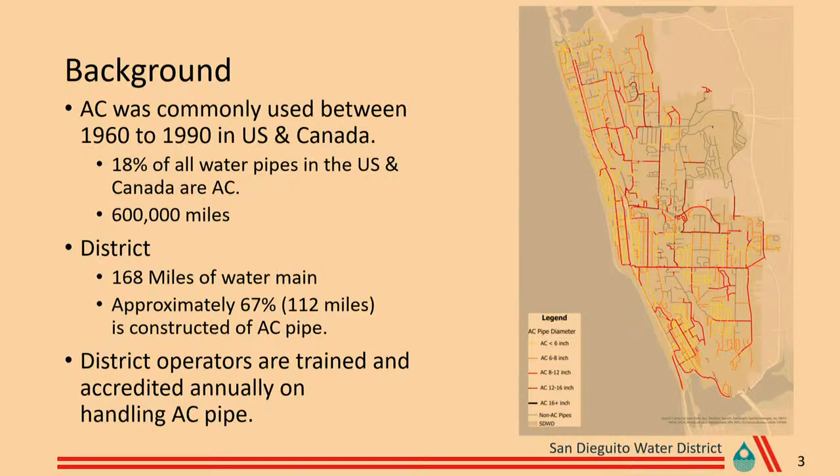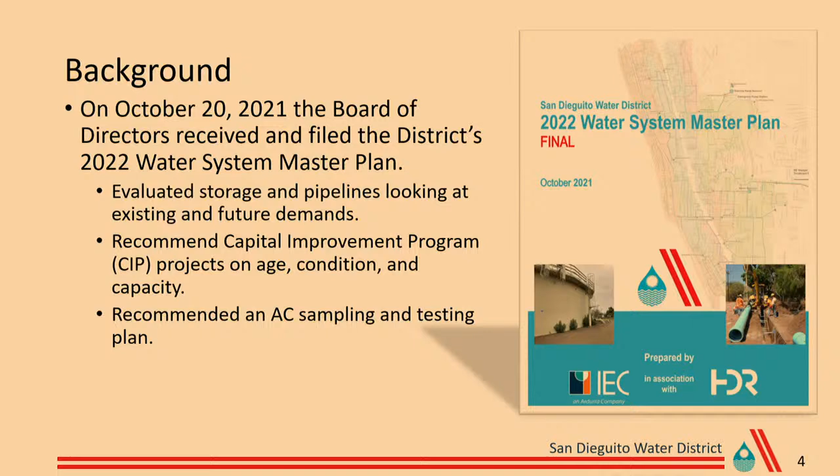In October 2021, the Board of Directors received and filed the district's water system master plan. This evaluated storage and pipelines and looked at existing and future demands. The water system master plan recommended capital improvement projects primarily based on age, condition, and capacity, and further recommended an AC sampling and testing plan.

On November 15, 2023, the board authorized a contract with Hoch Consulting and HDR Incorporated to perform a risk assessment analysis on the district's AC pipelines. The AC condition assessment reviews the AC pipelines in our system based on a thorough risk assessment, taking a look at samples and testing of AC pipe, soil condition, and our maintenance history. This was in order to make a data-driven decision in how we're going to replace the AC pipelines in our system.

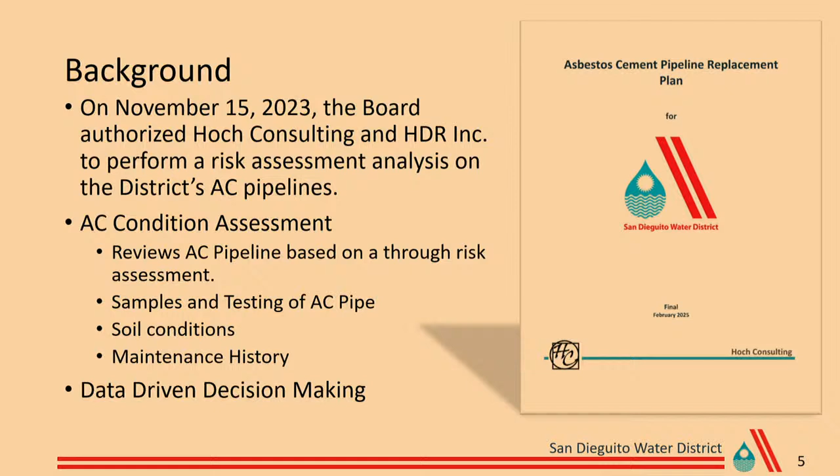And I'm going to hand it over to Adam Hoch from Hoch Consulting. He'll cover the technical approach of how we got to this report.

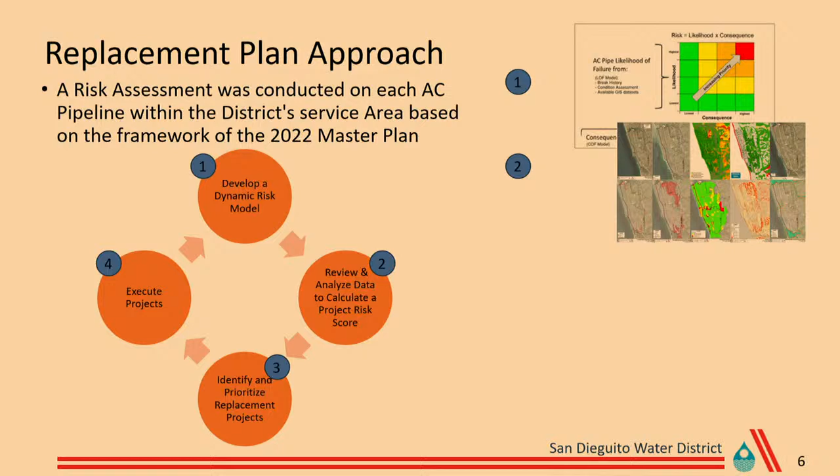Thank you, Elmer. Our approach to the replacement plan is really fourfold. The first element was to develop a dynamic risk model, dynamic meaning it can be updated by the city as additional information from the sampling and testing plan comes in. The second element was to review and analyze the data we had on the district system and calculate a project risk score, the risk of failure for any pipeline in its system. The third element was to identify and prioritize replacement projects for the next 10 years for the district. The last element was the execution of the project, the replacement element.

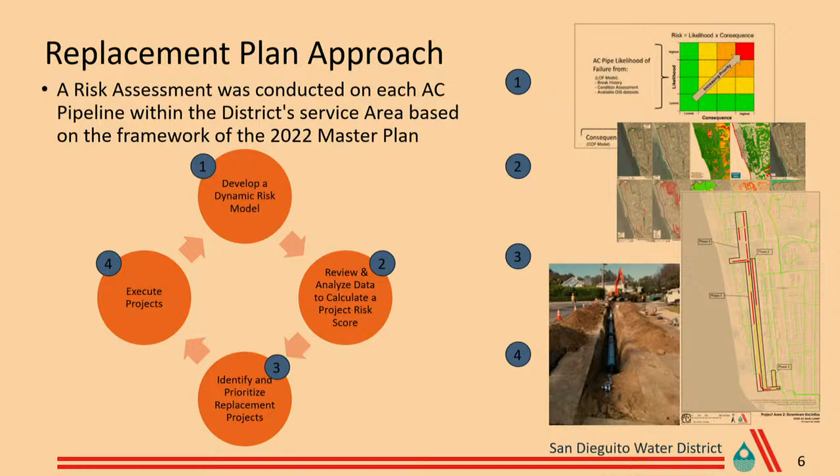A little bit about the first step, the dynamic project risk score model. It's built based on asset management principles, maximizing the life cycle of your assets. There are two main features: likelihood of failure analysis and consequence of failure analysis. Likelihood of failure essentially gives a probability that a particular pipeline is going to fail, given various characteristics and environmental factors. The consequence of failure speaks to the impacts of a particular failure. You've probably heard of the triple bottom line for consequence of failure — we look at the fiscal, social, and environmental impacts of any particular failure.

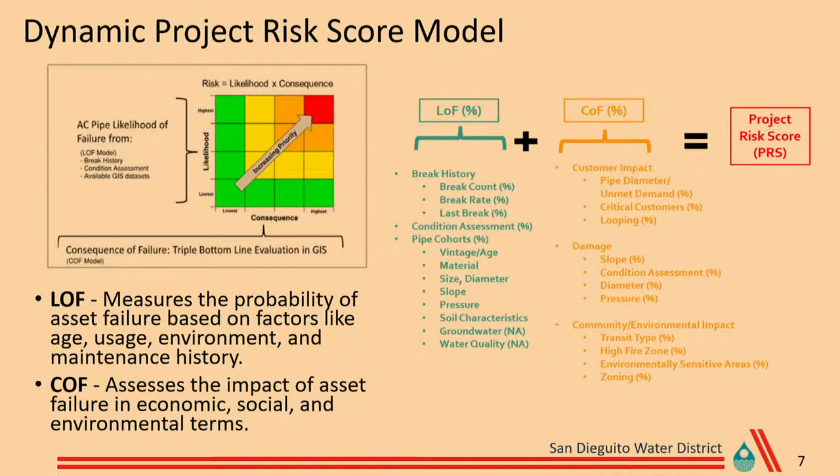This particular diagram speaks to an additive approach to developing a project risk score. We take a weighted likelihood of failure score and add that to a weighted consequence of failure score to develop the overall project risk score.

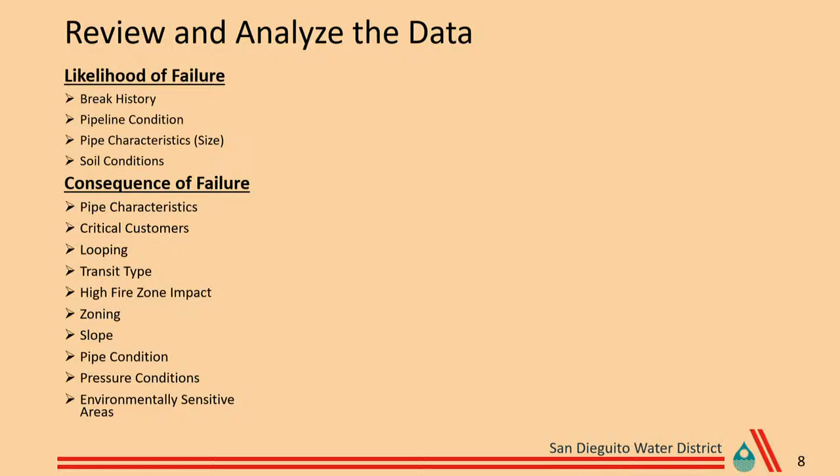In the review and analysis of the data, there are a number of characteristics we look at for both likelihood of failure and consequence of failure. This is a pretty exhaustive process of all the data available in GIS and from the district. Things that typically impact likelihood of failure are break history, the actual condition of the pipeline, and environmental factors and characteristics intrinsic to the pipe, like pipe size.

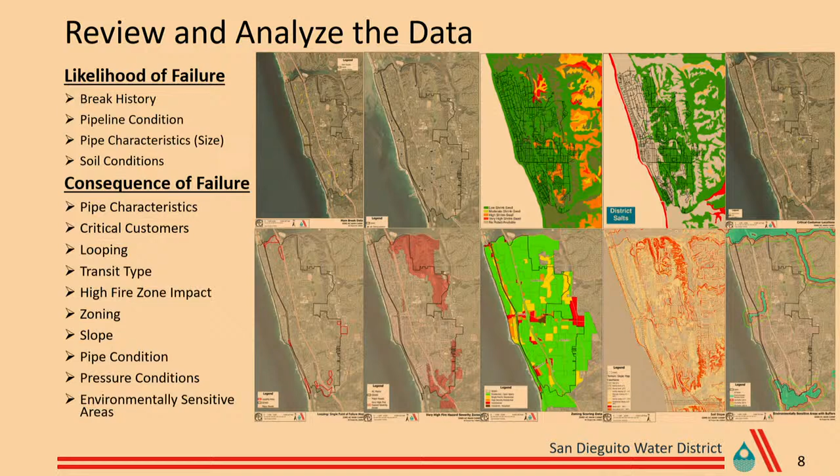The other element is consequence of failure. This is more of a qualitative approach in addition to a quantitative approach, to calculate the economics of failure and identify items critical to a particular district and city. An example is our critical customers evaluation: if a pipeline were to fail, would any critical customers like hospitals be put out of service? That's evaluated in the consequence of failure section.

For likelihood of failure, we focused on two main characteristics. The first is break history. For AC pipelines specifically, data consistently shows that pipes that have broken before are more likely to break again. In doing this analysis, we noted that the district system is performing exceptionally well compared to other systems of a comparable nature.

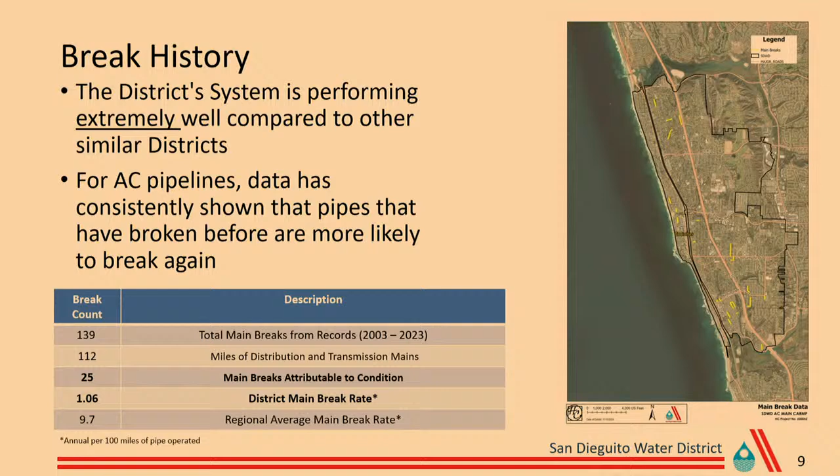One thing we use to identify that is the main break rate. The district's main break rate in that table, the second row from the bottom, is just over 1 break per 100 miles of pipe operated per year, whereas the average of the other agencies in the study was closer to 10 breaks per 100 miles per year.

The second characteristic we looked at was pipeline condition. AC main can deteriorate over time for a variety of reasons, and pipelines that have deteriorated are more likely to break. This was one of the reasons for the 2022 recommendation to implement an AC sampling and testing program, and the preliminary data from that was used in this study to inform our recommendations.

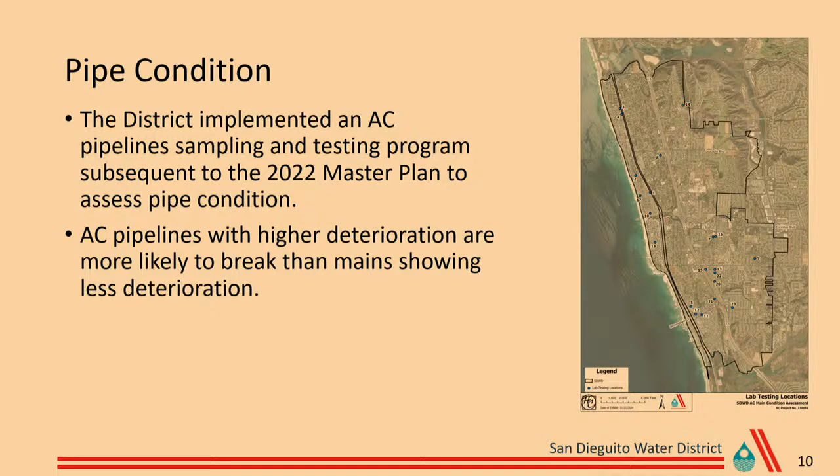This is a graphical overview of how we came up with a project risk map, and how likelihood of failure differs from consequence of failure to ultimately arrive at our project risk score. The left graph shows the raw likelihood of failure scores by pipeline segment. Green means a lesser likelihood of failure, whereas yellow, orange, and then red pipelines show a higher risk of failure.

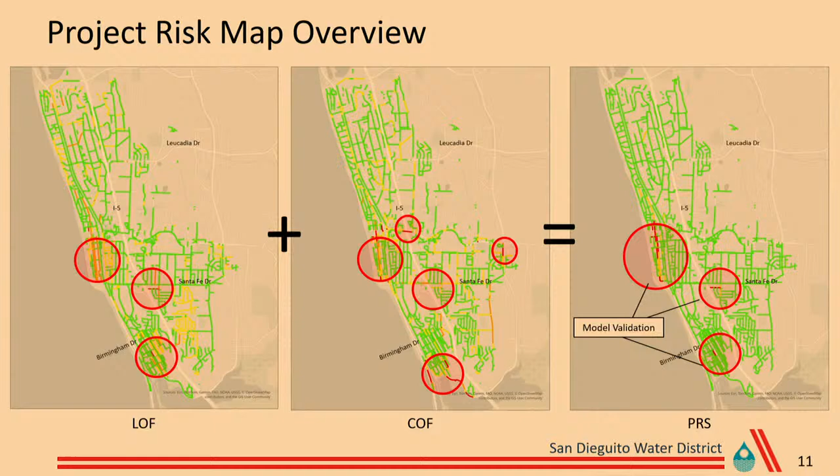Similarly, consequence of failure is shown in the middle graph, and the overall project risk score, once we add those weighted values together, comes out on the right-hand graphic. Once we came up with that project risk score, we did a calibration of the model to make sure it reflected real-world observations. Pipelines identified in the 2022 master plan that are currently in process for replacement, either design or preliminary construction, were used to calibrate the model.

This methodology came up with two main project areas. The first is Faith and Mackinnon. This recommendation is a little under 2,000 linear feet of 6 and 12-inch diameter pipeline replacement, adjacent to one of the areas identified in the 2022 master plan as needing replacement. Key drivers: the pipeline on Faith had 2 breaks within a relatively short time span, 2.3 years since the break. Additionally, the sampling and testing program showed this pipeline was deteriorated more relative to other pipelines.

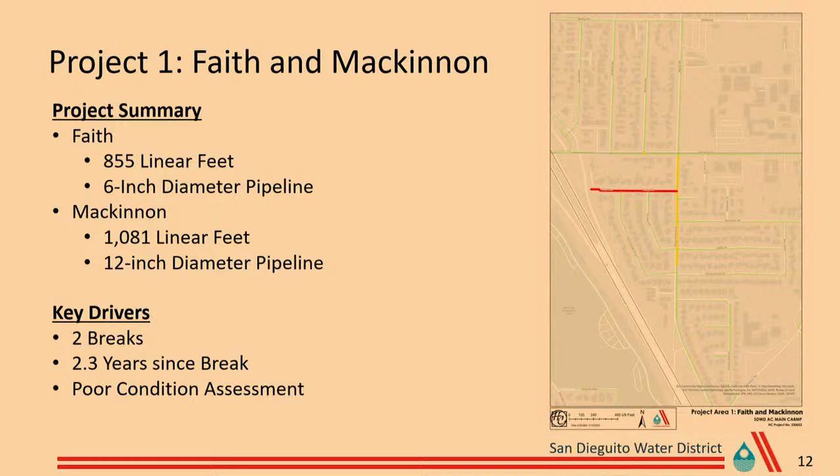The second project area is in downtown Encinitas. The pipelines we identified here are over 10,000 linear feet, and the replacement plan phases this into 3 different projects. It is 4-inch, 6-inch, and 12-inch pipes. Again, the key drivers are multiple recent breaks and poor condition, and this project also has some inoperable valves in it, which will be replaced as part of it.

And with that, I'll turn it back over to Elmer.

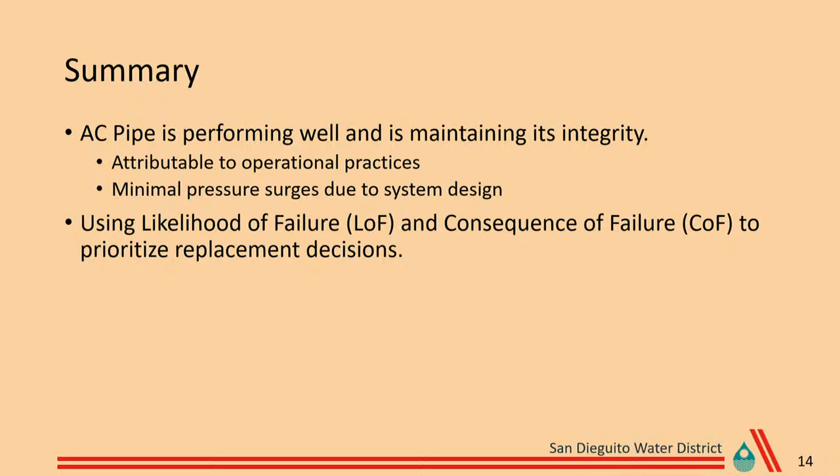Thank you, Adam. So in summary, our AC pipe is performing very well and maintaining its physical integrity. A lot of this is attributable to our operational practices, including minimal pressure surges due to our system design, which is a gravity design. And using likelihood of failure and consequence of failure to prioritize our replacement decisions came up with those 2 projects.

So I want to frame how those projects fit into the next 10 years with some of the projects in the water system master plan. The first project is the Cardiff replacement project, that's ID number 1. That was identified as project number 1 and 2 in the water system master plan, and is currently in design. We also have the water system capacity improvements.

We're also doing an ARV and blow-off replacement phase 2, and then the Faith and Mackinnon downtown phase 1, phase 2, phase 3, as Adam is saying, to break that apart due to cost, to level out expenses, but also from an operational standpoint it'd be very difficult to replace that many mains in one project and keep everyone's water service going.

I'll come back to this slide to cover more of the projects. So the Cardiff replacement project, again, was in the 22 water system master plan. Like I said, it's in design. It's about 3,300 linear feet of replacements all along Cambridge, Oxford, Montgomery, Newcastle area in Cardiff.

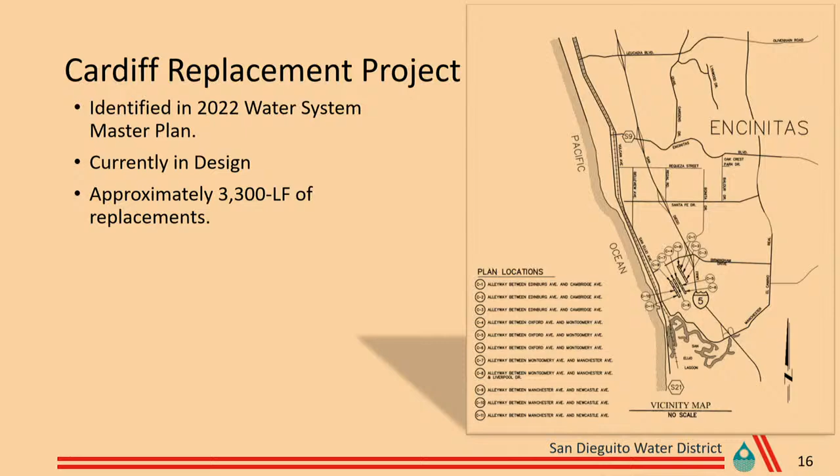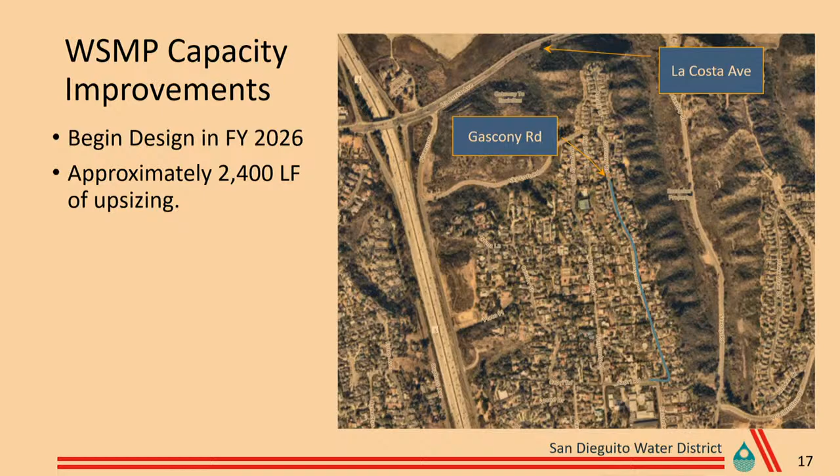The water capacity improvements project, that was ID number 2. We're going to begin design in fiscal year 2026. This is approximately 2,400 linear feet of upsizing, including a segment on Gascony, just south of La Costa Avenue, and a couple areas on the south side, Avocet Court and Via Temple—about 1,400 linear feet of upsizing of pipe.

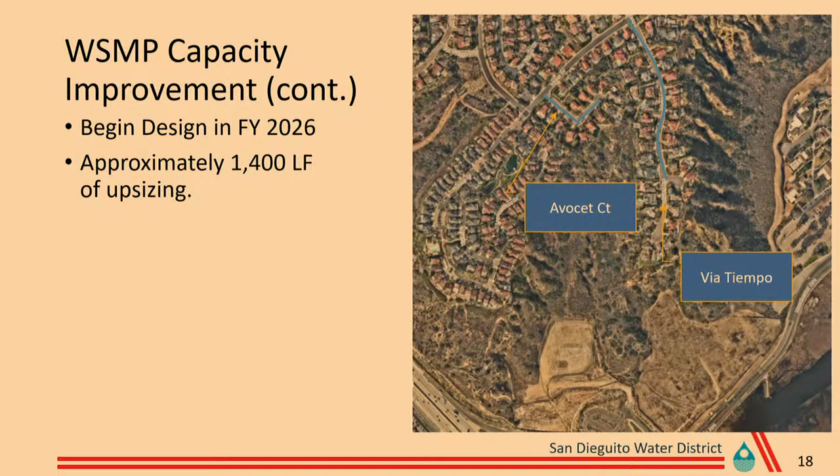Along with this plan, we'll also be implementing this asset management from Hogue. They're giving us a replacement analysis tool, so we'll update this model they prepared for us periodically as new data comes in, such as new breaks, or as we continue sampling, if we discover other areas of deterioration, to help us make decisions along the way. This will be a continuous business practice by the district staff.

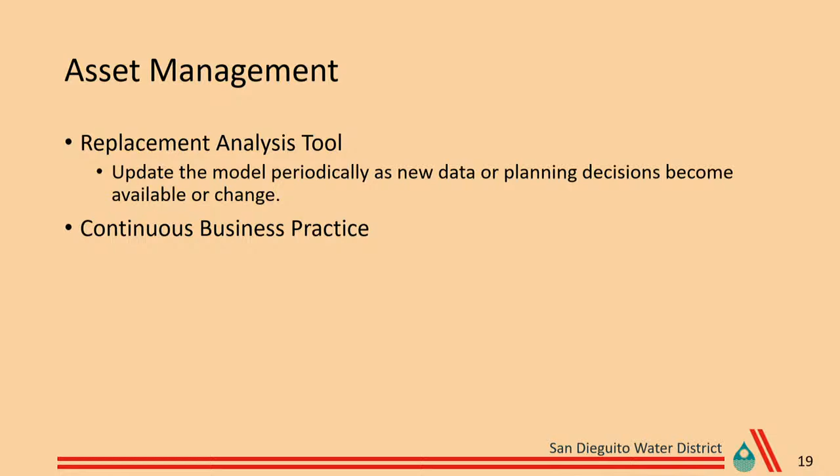Staff's recommendation is to receive and file the asbestos cement pipeline condition assessment and replacement plan. Staff is available if you have any other questions.

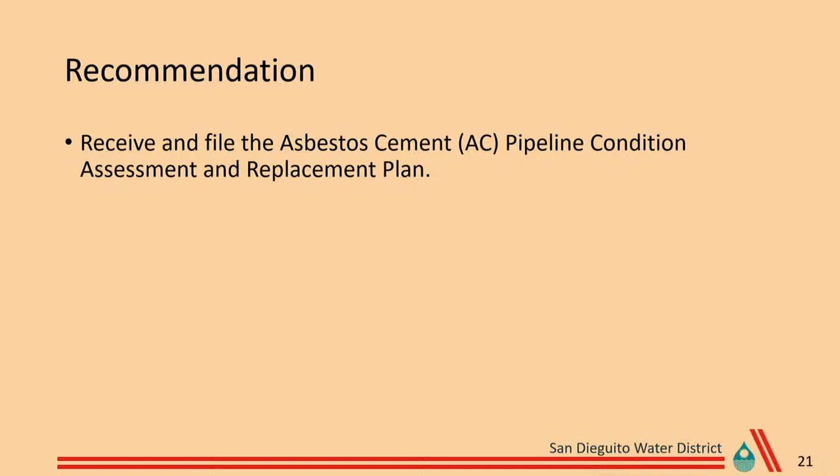Thank you for the presentation. I don't see any speakers in the queue yet. Oh, yes, thank you, Board Member Schaefer.

Thank you for the presentation, really appreciate it. With all of the priorities, do we have any look at—again, I've made mention over the last month of us being a high earthquake area—is there any indication or areas of greater concern because of earthquake danger or something of that nature?

Earthquakes certainly can pose a negative impact to water systems. What we saw, predominantly from the sampling and testing plan, was that there are pipelines that are softer and more deteriorated than in other locations, and it's not spaced out by age of pipe. You have 1950s pipe that looks relatively good, and 1970s pipe that looks pretty deteriorated. So earthquakes in general can impact pipes that are more deteriorated or more brittle than others. That's a factor, but it's a factor with most water systems when you have earthquakes.

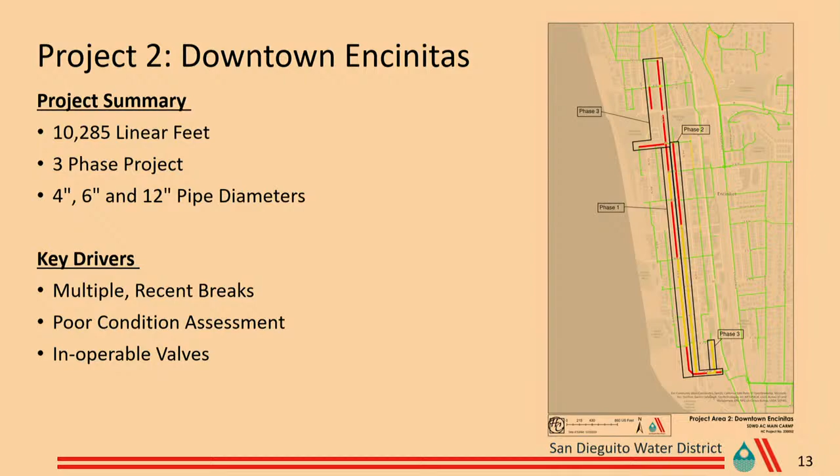So, okay, great, thank you. Other than that, I support it. This is just informational, right? Yes, it is. Great, thank you.

So I appreciate the great technical presentation, boiled down into something that's a little easier to understand. That's always difficult, so I appreciate that you've done that. I also appreciate the technical questions and the technical answers. I am really happy that we've gotten to the point where we really have this real detailed information. We know what's underground, we know what its condition is. When we knew a couple years ago that the infrastructure was getting older and it was time to assess this, it takes a couple years to get to this point, and I've been looking forward to this so that we can understand where our priorities are. So I appreciate you putting the good work into it, and I did love the detail, especially when it came to soils. But the interaction of the soils with the pipe is very interesting.

I have a couple questions though, for more clarification, if you don't mind. So, Mr.

Alex, I'm not sure if you're the right person to ask this, but if you're not, please direct it to who is. We now have a dynamic risk model established and set up. I understand these models are meant to be updated over time to assess ongoing condition and priorities. How does staff actually do that? Do we have a process? Is it an annual thing? What is the process for evaluating and updating that model? Is it an official thing?